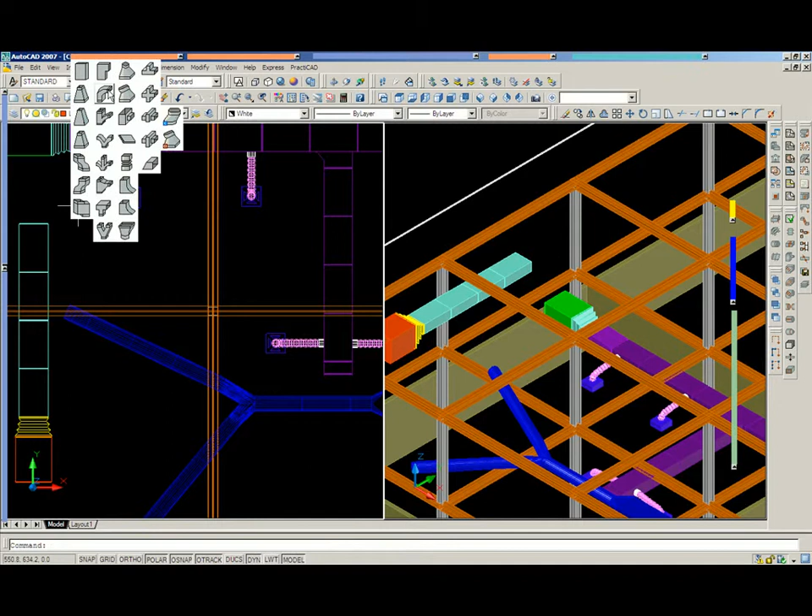PractiCAD works directly on top of Autodesk products, importing and exporting data in their native DXF DWG format. This allows drafters to create 2D shop drawings or 3D CAD drawings which can be sent to other mechanical contractors for coordination. PractiCAD allows you to take advantage of AutoCAD's ability to design in 2 or 3 dimensions simultaneously with great ease. However, with our unique PractiCAD tools at your disposal, you will be able to detail up to 70% faster than working with straight AutoCAD.

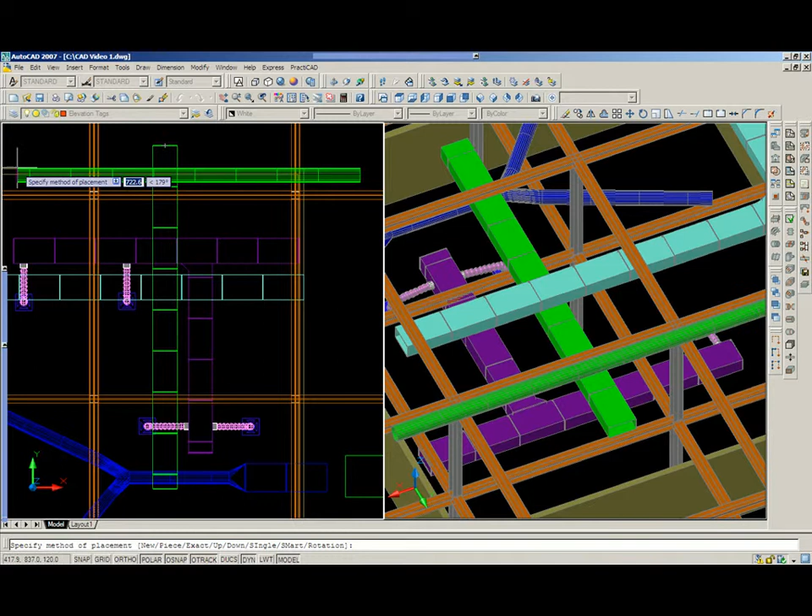There are many advantages that a detailer gets when they start to utilize PractiCAD, but 3 we will focus on here are the ease of use, speed of detail through automation, and the ability to integrate all levels of the production process.

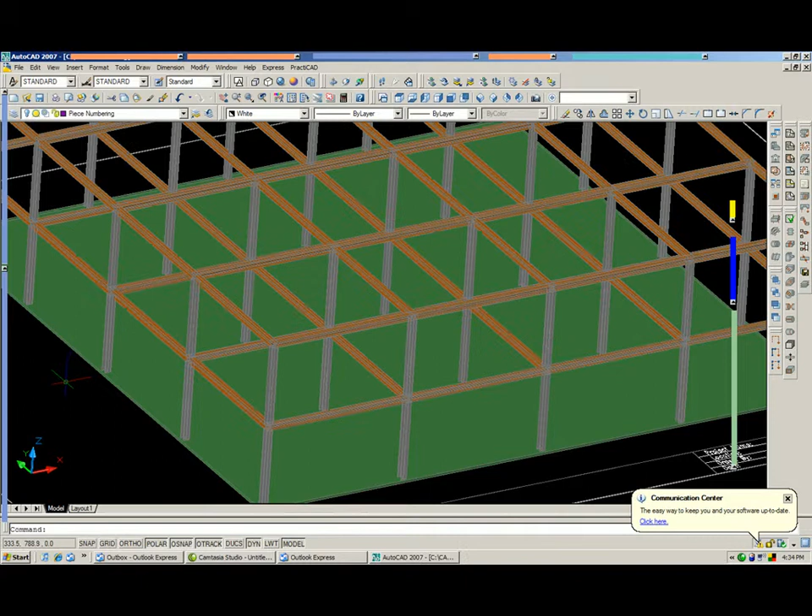Just like PractiCAM, PractiCAD comes with a completely customizable interface where we can create bins to hold all of our items such as rectangular, round, or oval duct. We also have a full set of architectural items which can be created by the user and put into catalogs for easy access later. Some of these items include concrete slabs, columns, beams, ceiling grids, diffusers, walls, duct, and flex. All items can be drawn up in 2D or 3D and exported out to other Autodesk products for coordination. All ductwork is exported out directly for instant fabrication.

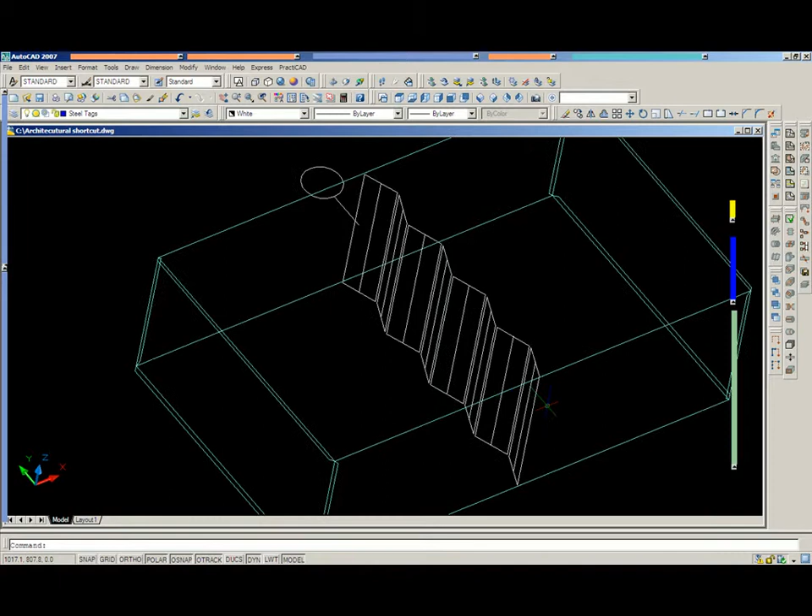On top of the items we have already mentioned, PractiCAD comes with a complete set of accessories which can be imported from PractiCAM or exported for manufacturing. Some examples are radius vanes, turning vanes, a variety of dampers such as single volume, parallel blades, opposed blades, smoke dampers, fire dampers, counterbalance, motorized, a variety of dampers for round pipe, and you can even get tie rods.

All come in a what you see is what you get format, and when exported will have all of the manufacturing done by PractiCAM, such as the mitering of splitter vanes or damper shaft inserts. This is yet another step in true automation.

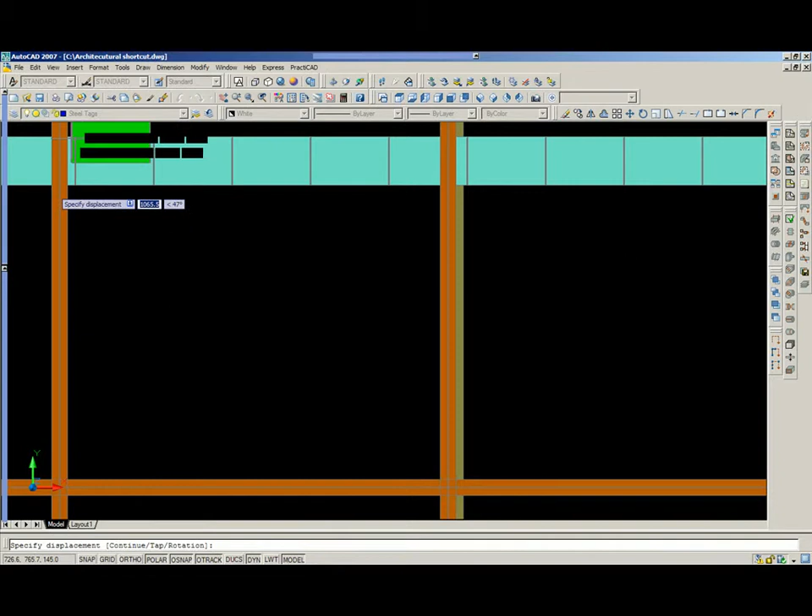First, let's start with the basics. Placing objects with PractiCAD is simple to do. All you need to do is select the object you want to place down, change the parameters, and select your elevations. PractiCAD will automatically track your elevation points and reference points as you move duct throughout the system. PractiCAD will also adjust certain things based on fabrication standards.

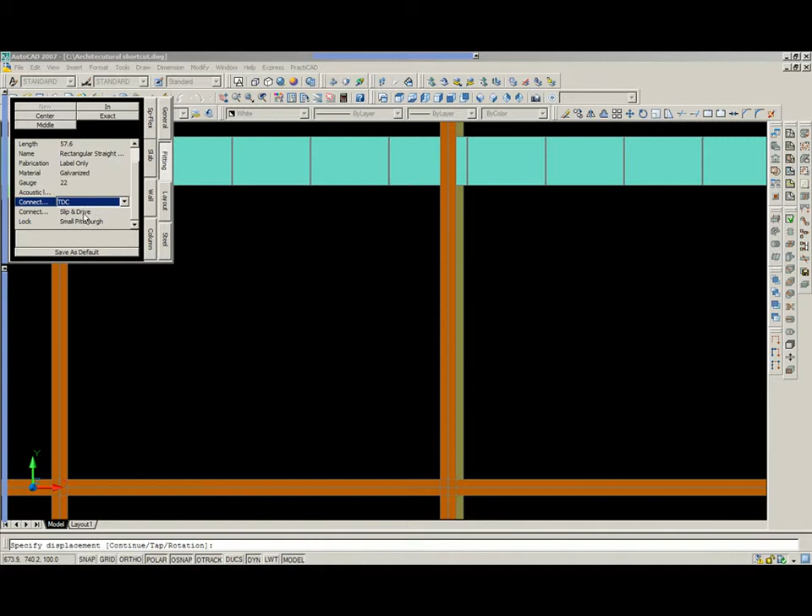For example, if we pick up a piece of rectangular duct, you will notice that slip and drive connectors yields a 59-inch length. However, if I switch the connectors to TDC, you will see PractiCAD automatically adjust the length of duct based on our own standards.

Another thing PractiCAD will do is adjust duct properties based on an unlimited number of specification tables. You will see as we pick up a specification table here that PractiCAD will ask us to do one of 3 choices. We can apply spec table to new fittings, entire drawing, or current selection. This means that at any point in time, before or after I lay down a duct system, I can change the parameters and make them adhere to a specific specification table.

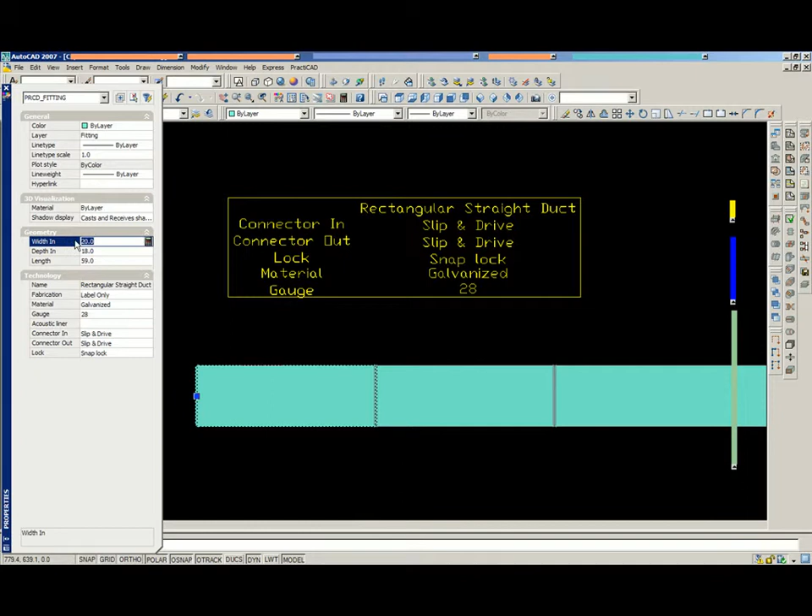Notice here as I change the width on this duct line that you will see that the locks, gauges, and materials are all adjusting automatically for us. Not only do we see the values changing, but what you see is what you get graphics will also allow us to see spec tables at work. Here as we orbit, you can see that TDC connectors have been applied to our duct system.

One of the key elements that contributes to PractiCAD's simplicity is our automatic duct line editing. We understand that plans will continue to change as you coordinate with others, making it very important to be able to adjust your drawings on the fly without having to erase and redraw. Notice how PractiCAD automatically edits things here as we adjust pieces and full duct lines up and down the system.

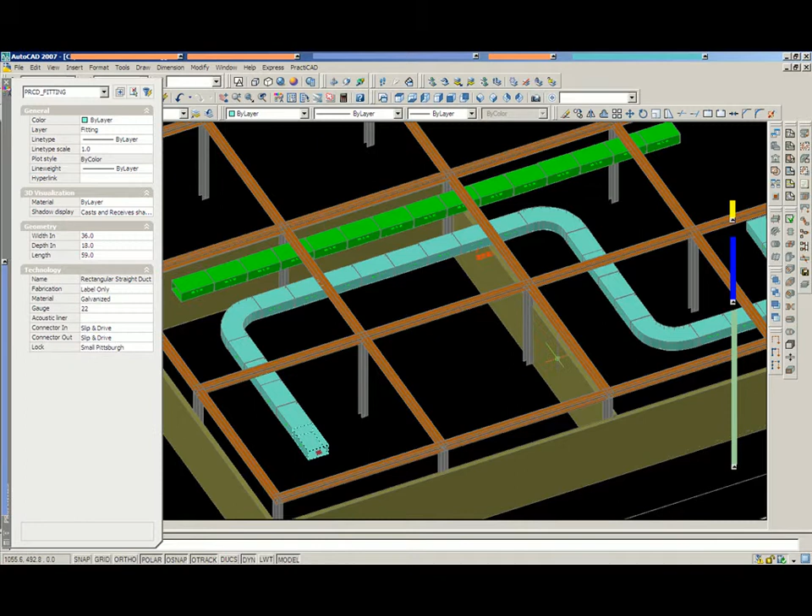To edit just one piece of duct, all we have to do is click on the duct at any time and all of the parameters will appear right over here on the left. Here we can change the size of the duct over and over, and you will notice that our duct line automatically changes for you, keeping the duct run's integrity intact. You will notice that even the tags are maintaining their current positions and elevations as we move throughout the system.

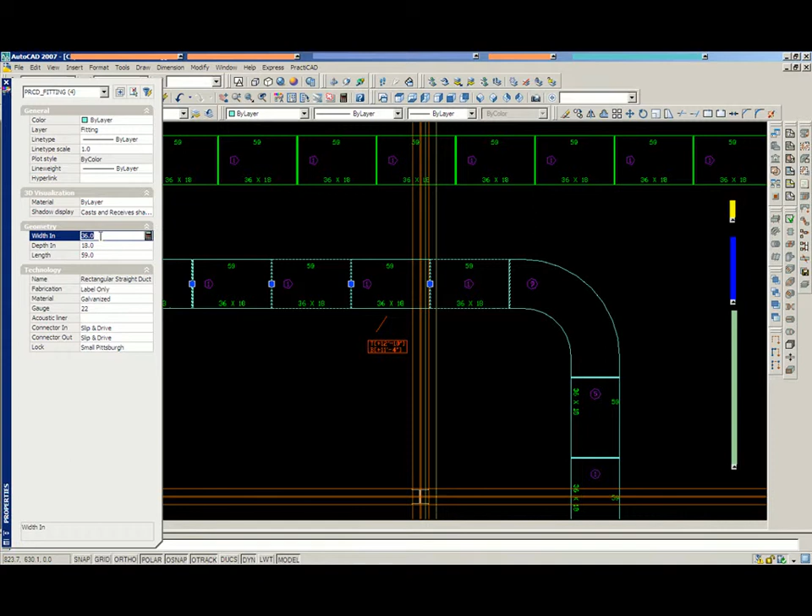We don't have to adjust just one piece of duct at a time either. Using a specialized automatic select, I will select 4 pieces of duct and simultaneously edit them all at once. Notice here as they are highlighted that I'll adjust the width and depth of only 4 pieces.

Notice the changes here. As you look closer, you'll see that not only are the 4 pieces changed, but PractiCAD has automatically added a transition before the change and turned the elbow into a drop cheek elbow to compensate for the adjustments. Even the tags have once again changed to their proper values, size tags and elevation tags.

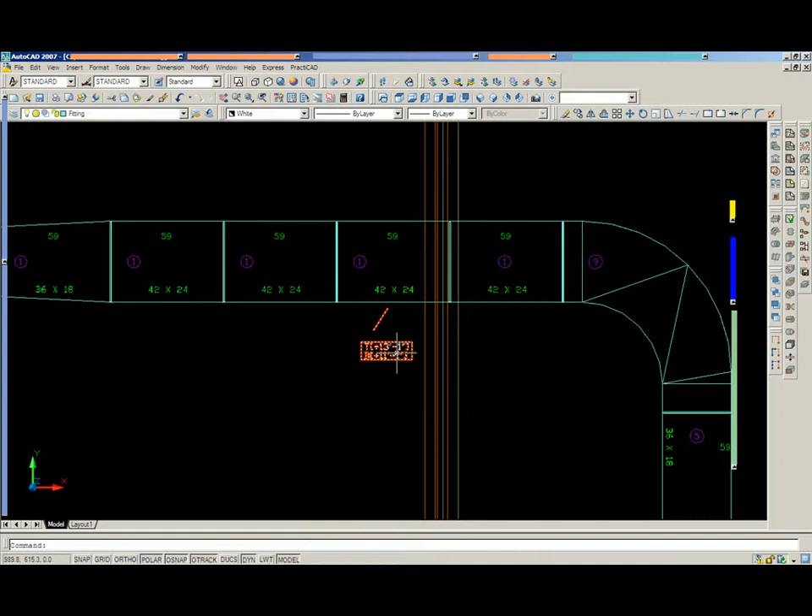These are just some of the options within the system. You can create numerous different scenarios if you like. Here's an example where we decide to add liner after we have already completed the run. Notice that PractiCAD will auto-adjust to compensate for the addition of the liner as well.

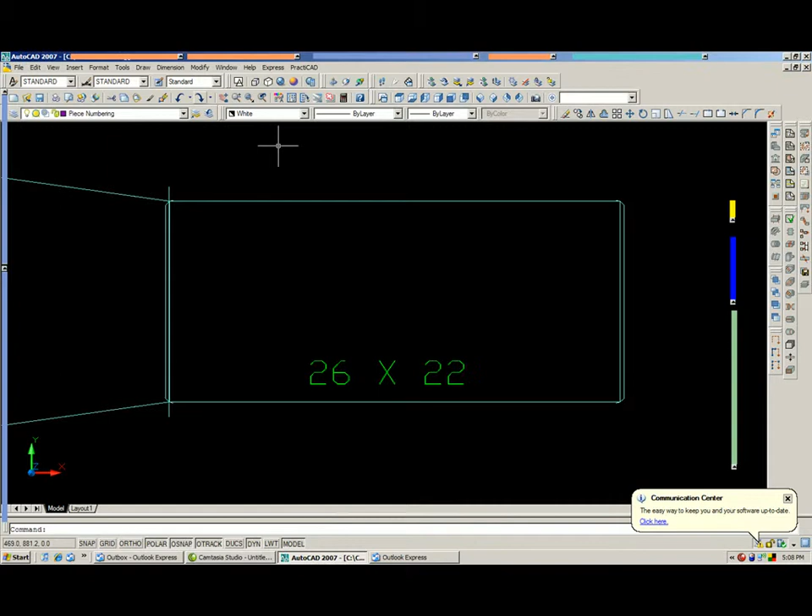As you might have guessed, PractiCAD comes with a very intelligent custom tagging mechanism. Users can design any type of custom tag they would like and drop it in their bins for easy access. Here we are laying down some of the different types of tags we offer. We can do size tags, elevation tags, general tags, property tags, or the ability to design any true custom tag we want.

For example, here we have a transition tag that knows whether the top is up or down for this transition, and it marks it accordingly.

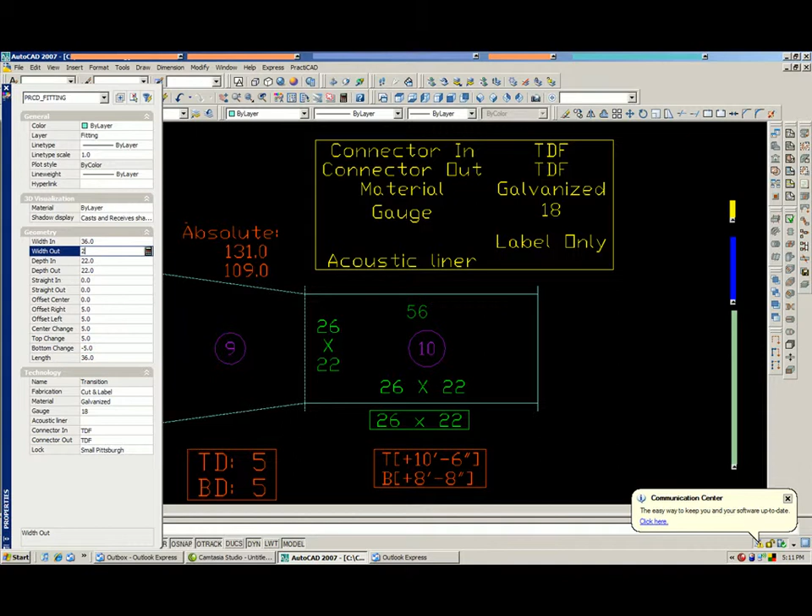The most important fact is that our smart tags know the properties to which you apply them. You'll notice here as I continue to change sizes, elevations, or properties over and over again that I do not have to retag the drawing. Everything automatically adjusts. As I change elevations here, notice the absolute elevation tag up top and the elevation tag on the right completely adapt to the new adjustment.

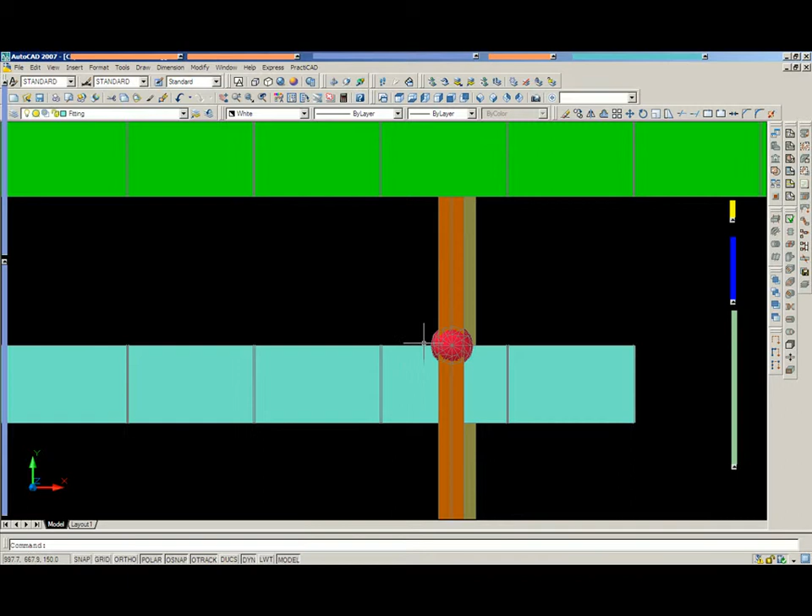PractiCAD also comes with a state-of-the-art collision checking mechanism. You'll notice as we run duct into this beam that PractiCAD automatically flags it with a collision mark. If you click on that mark, the system will tell you how far you need to move one of the two objects in order to clear.

This makes things easy for working in plan view. However, at any point in time you can highlight a specific area or select objects and click on our partial view feature. This will separate the area you are looking at and put it into an orbit view so that you can easily see everything in 3D, just as you see here.

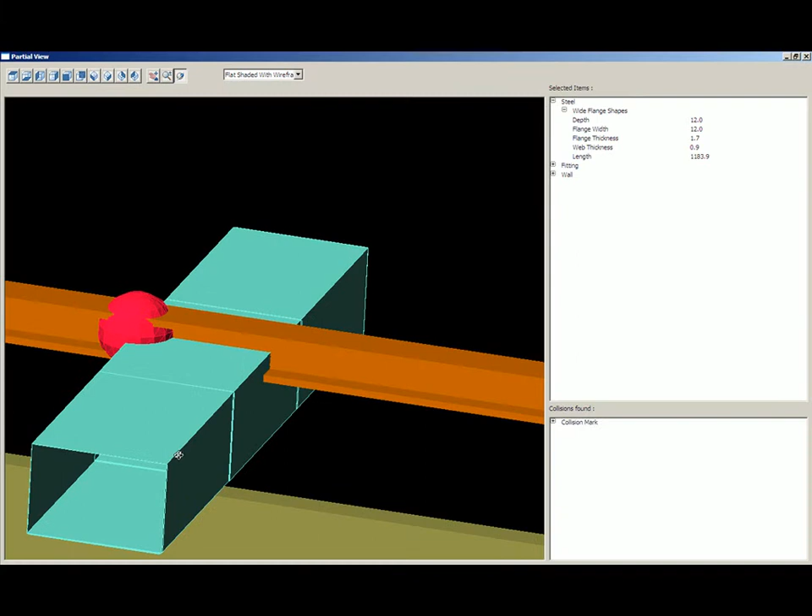You will also get a breakdown of the parameters for all the objects you highlighted. This also makes spotting collisions easy. All you have to do to avoid this trouble is move the duct line down by the amount PractiCAD has specified.

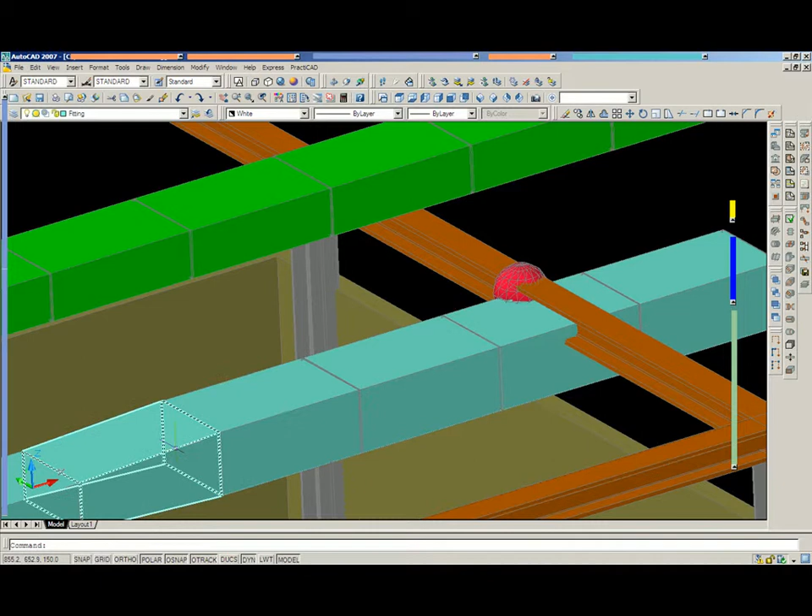Since duct line editing makes things simple, we will just adjust the transition and immediately we will see that the collision mark disappears, letting us know it is okay to go on and continue working.

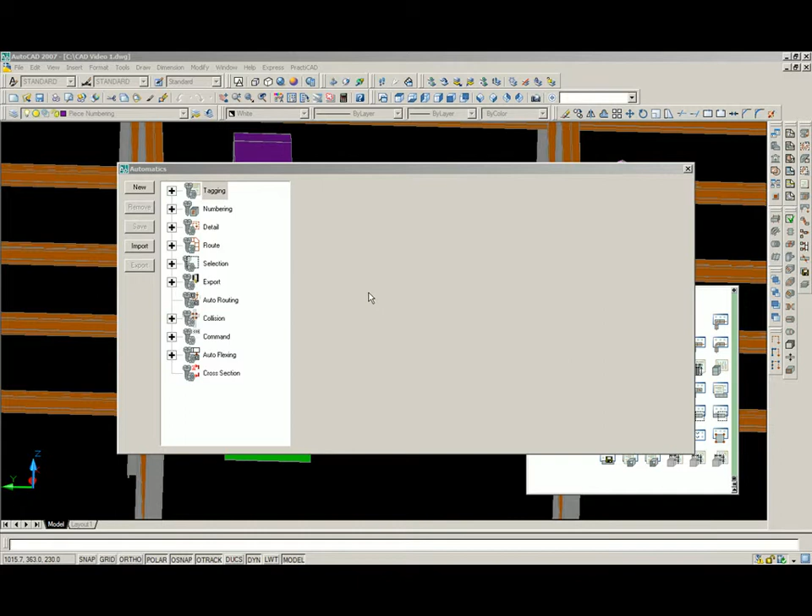Not only does smart custom tagging, geometric editing, and advanced collision checking make PractiCAD easy to use, but we have introduced a new CAD concept called automatics. An automatic is essentially a one-touch click, user-defined, that will do any number of tasks inside PractiCAD. We have them available for all of the following, including detailing, routing, numbering, tagging. The concept speeds up the drafting process by 50% or more.

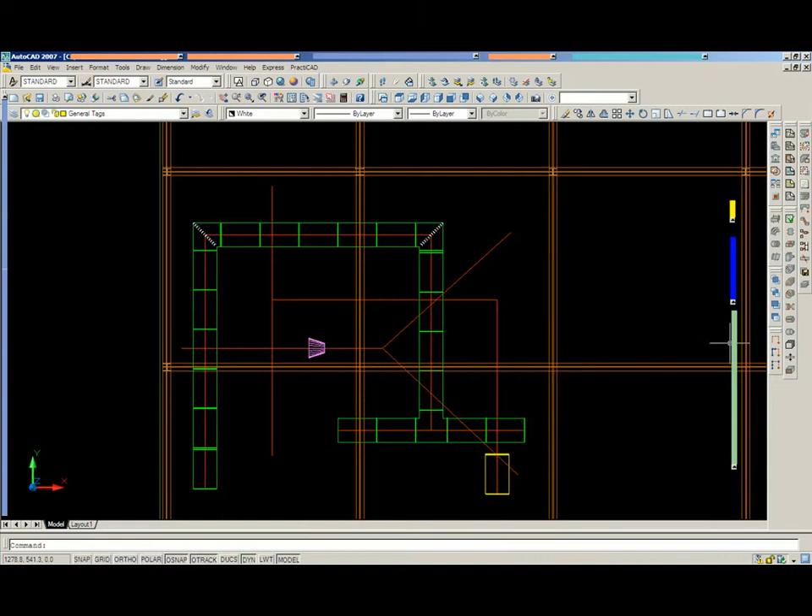Let's take a look at some examples of these automatics at work. First, we will show 3 detailing automatics. Imagine I'd like to detail a duct line on a given elevation with a given slope, with slip and drive connectors, square elbows with turning vanes on turns, finish length pieces of duct, and square elbows on tees. I can tell PractiCAD to do all of that in just one click, as you see here.

Now we will detail the second line with radius elbows, radius turns, and radius tees. Third, we will detail in finish length pieces of round pipe, a reducer, and a Y. All of this can be accomplished with one click, and as you can see here, automatics for detailing make things quick and easy.

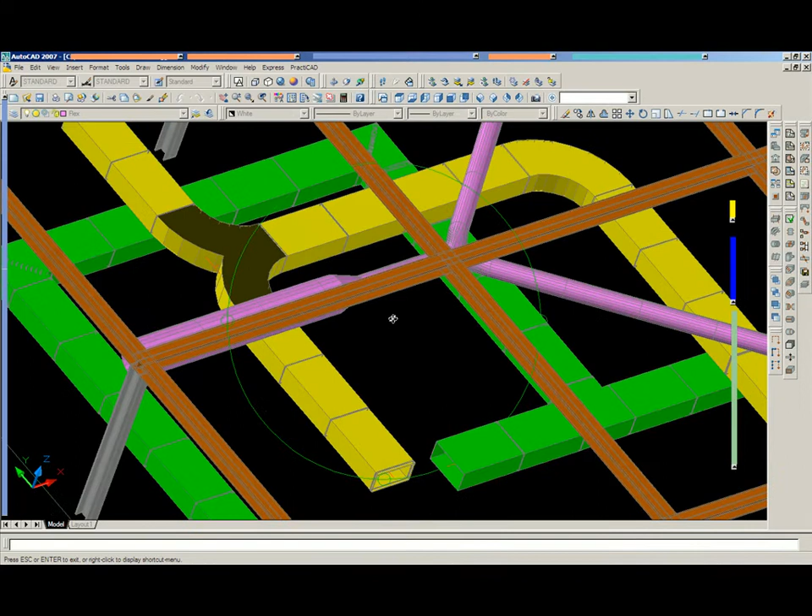Just like we do for full duct lines, we can detail or route duct in between breaks in duct lines. This makes it easy to fill duct between 2 points, even if they are on different planes. You can see here as we put our drawing on the side view, and then as we orbit it, that we have duct with different sizes that are at different heights.

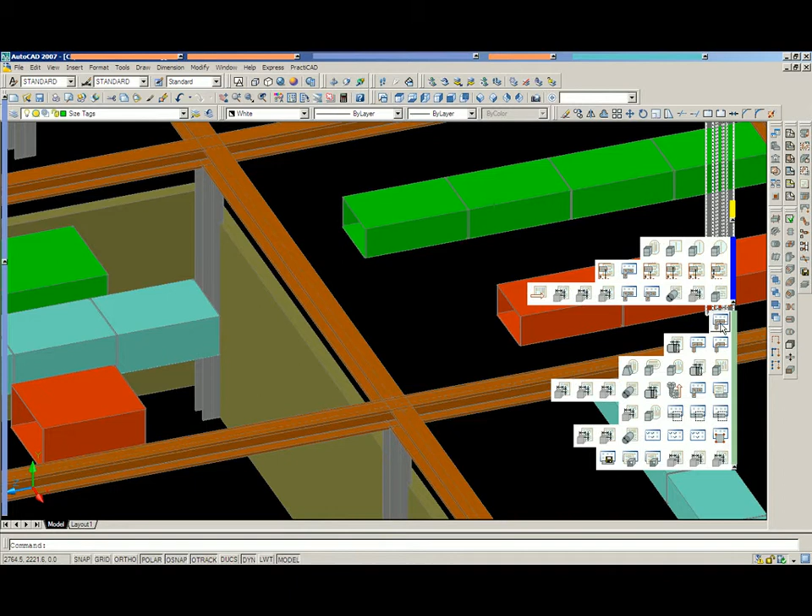Watch as we use our routing feature to route in between these 3 duct lines. The fittings that we are using are selected by the user. For example, we are going to connect this piece of duct in blue to the other duct line. You'll notice that it decides to use rectangular duct followed by a square elbow with turning vanes in it. That was user defined; he specified it during the automatic.

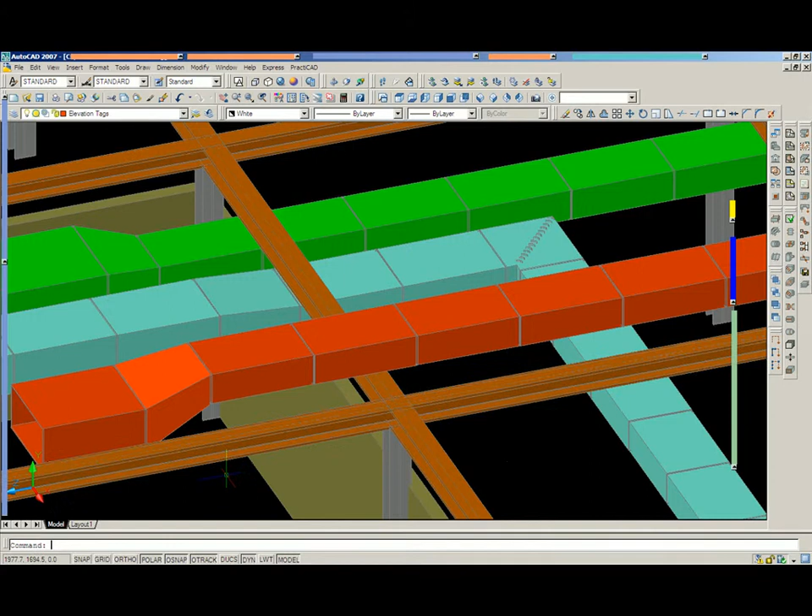As always, once a duct is routed properly, we can immediately start editing the duct line on the fly if we'd like. When you combine all of these tools, you have a very powerful detailing program that will greatly reduce the time it takes to finish the job.

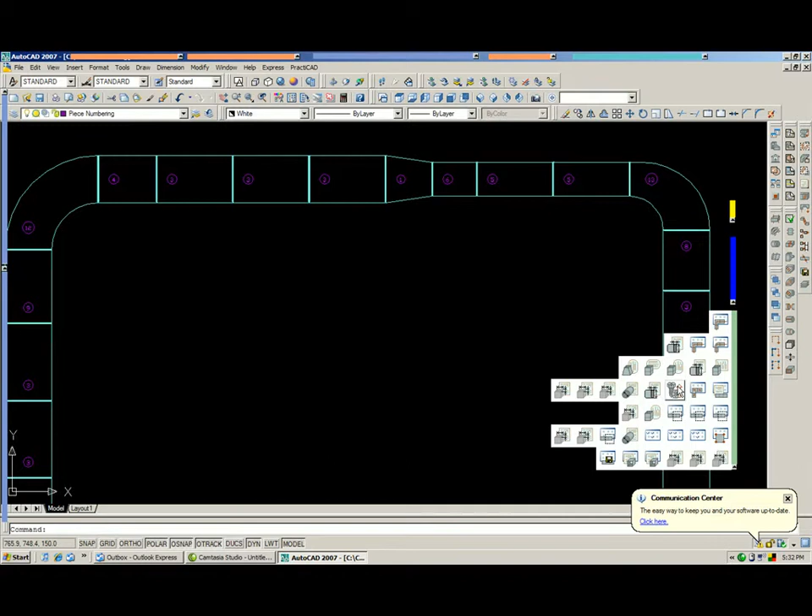Just like routing and detailing, I can also create one-touch automatics to place piece numbering or tags down. By designing custom tags and telling PractiCAD to place them at given locations, I can speed up my detailing process tremendously. I might want a width by depth tag that goes between 2 points, or one that goes on straight duct but skips elbows, maybe piece numbering in the top left corner of each duct, custom transition tags, custom elevation tags before and after changes in elevation, or size tags before and after a change in direction.

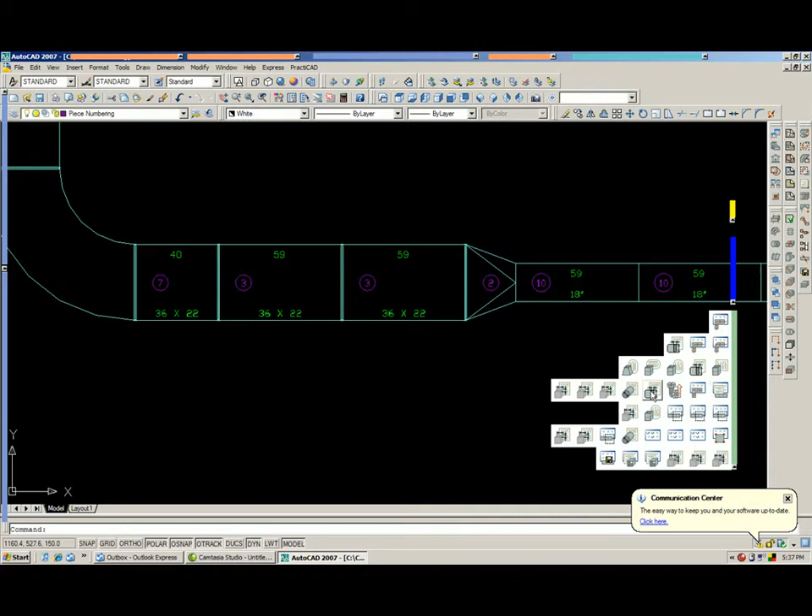The possibilities are limitless. The bottom line is that detailers have styles they use over and over again. PractiCAD allows the user to design one-touch clicks that lay out these styles for them. This keeps the drafters fast, but also allows them to detail with the same styles across the board, making them consistent from drawing to drawing.

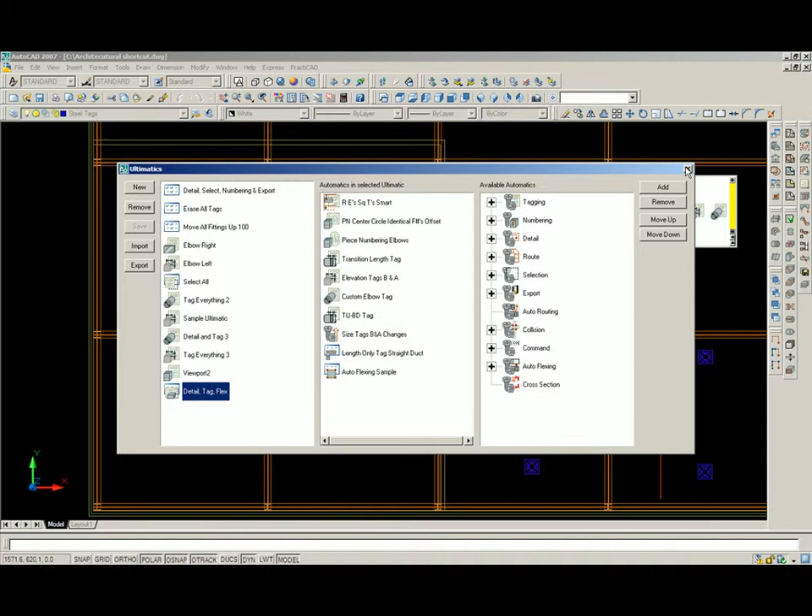Ultimatics. An ultimatic is a one-touch click that combines any number of automatics. Here you can see as I create an ultimatic by listing the automatics I want to use simultaneously with one button. With this feature, I can detail, piece number, tag, attach flex, or anything else, and do it all with the touch of just one button.

Watch here what happens on just one click. I will zoom in and go about the duct. You can see that all of our tags have been placed down simultaneously, exactly where we want, all with the touch of just one button.

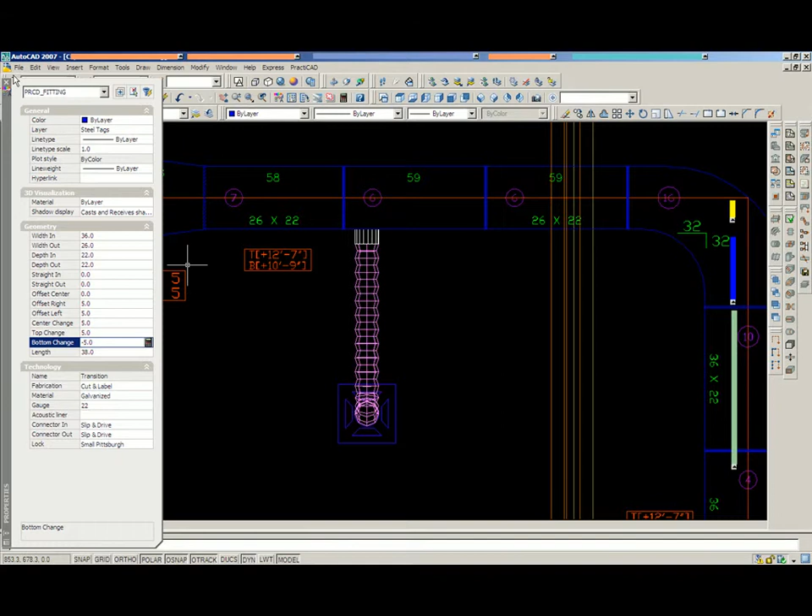The best part is, as always, you can continue to adjust everything on the fly. You never have to worry about redrawing anything. Just click on what you want to adjust and PractiCAD will adjust it automatically for you. Here we will run another Ultimatic. Just imagine the speed of detailing when you can do so much with just one click.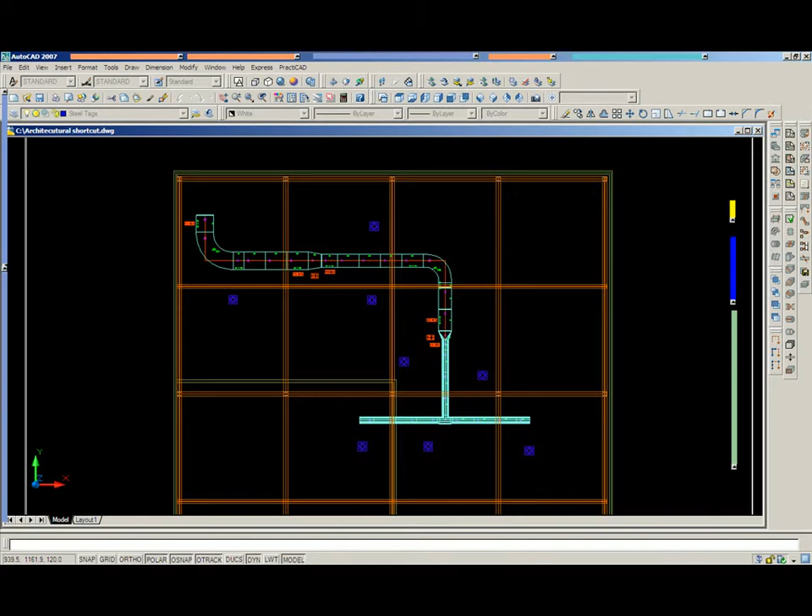Automatics and Ultimatics are currently concepts and designs that are exclusive to MetaLab. No other systems on the market can detail or tag a drawing more effectively or efficiently.

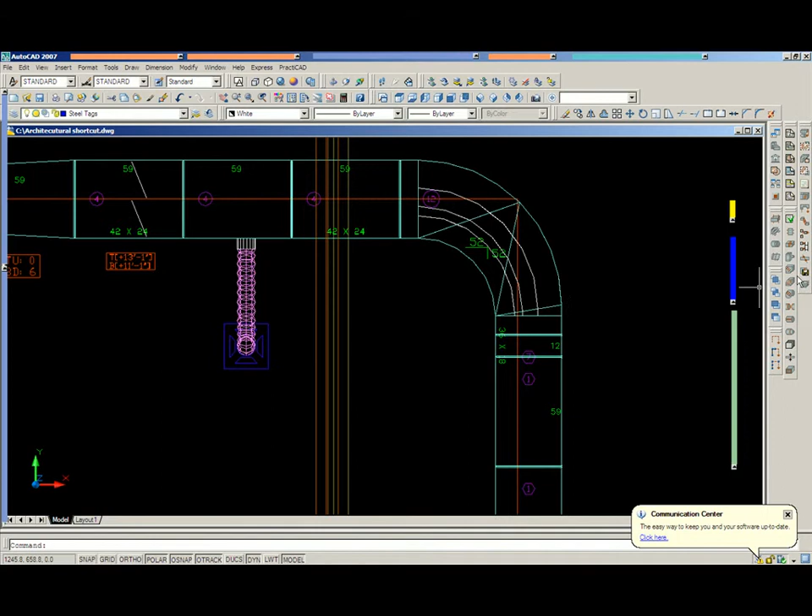Exporting the duct line is one of the most important parts of integration. Instead of having to input each and every fitting into your Plasma software, just download everything directly to PractiCAM. PractiCAM is the most advanced manufacturing system on the market today, and everything downloads directly from PractiCAD to PractiCAM and vice versa. Once we have completed our line, we simply press the export button labeled Takeoff, and everything will be sent directly to PractiCAM.

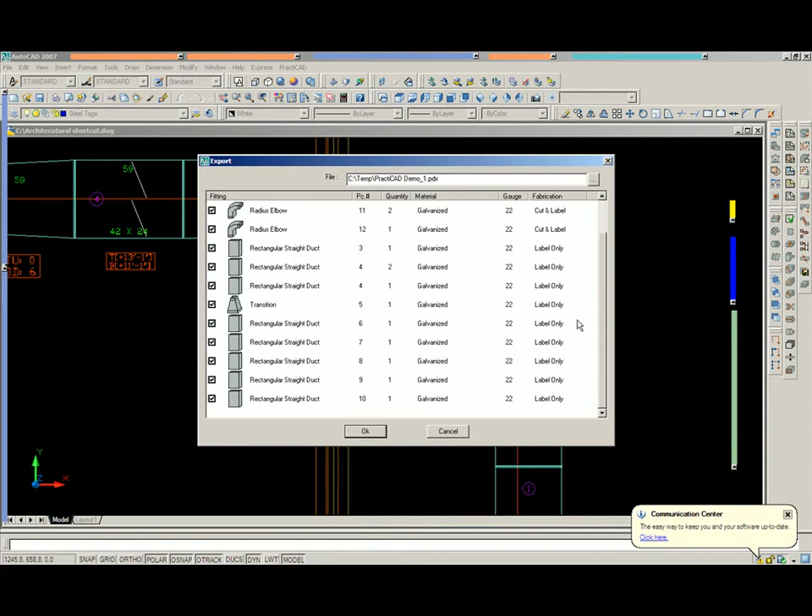You will get a list of all of the fittings that are being sent over, and when you go to PractiCAM, you will see them under the file you just saved them in. Here is a list of all of our fittings. Now all you need to do is highlight all the fittings you'd like to put into a takeoff, copy them, and paste them directly inside.

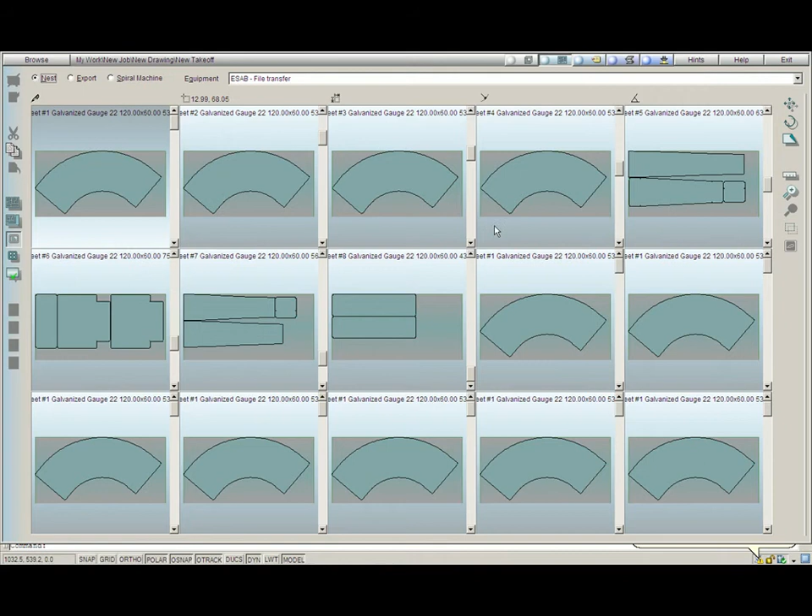At this point, PractiCAM will do all the rest of the work. It will do all of your design, it will do all of your nesting, it will do all of your labeling as you see here, and it can also print out any type of custom report that you would like. Last but not least, it will do all the fabricating for you.

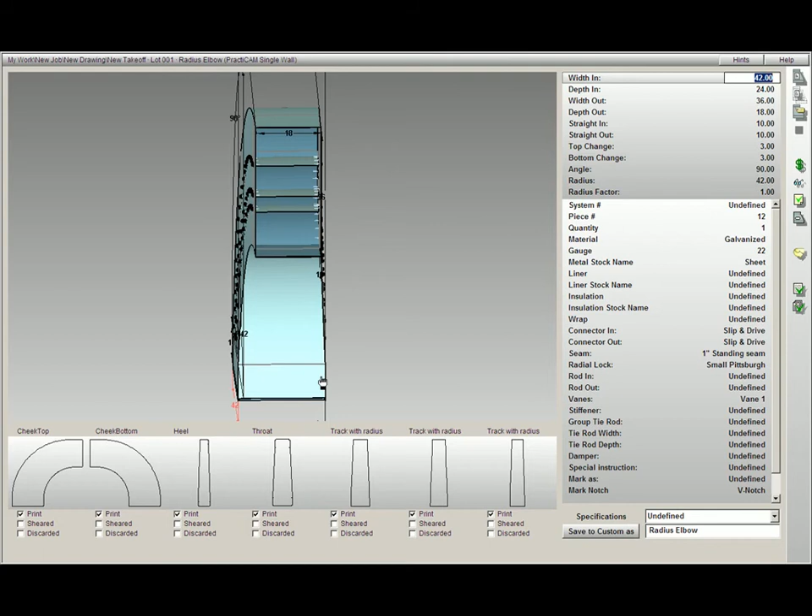And fittings can be exported to a coil line as well. You will see that you can also modify the fittings right here if you'd like. Take notice that the drop cheek radius elbow with splitter vanes in it has all the manufacturing done for you. The vanes are mitered, the holes are burned for tack welding, and here we're going to put in a custom modification.

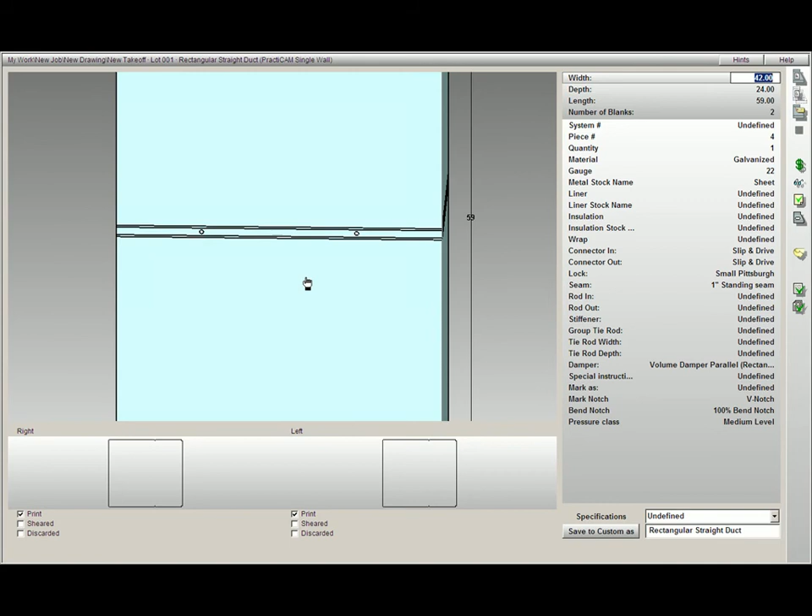The same goes for the dampers in the rectangular duct. You'll notice that the dampers have been downloaded, and the damper shaft inserts have been burned out for fabrication. This goes for all accessories that you download from PractiCAD to PractiCAM.

Once things have been downloaded, last but not least, you can get a complete cost estimate on each individual piece of duct, or you can get it on the entire job. This way you can see how close your bid was to the actual job.

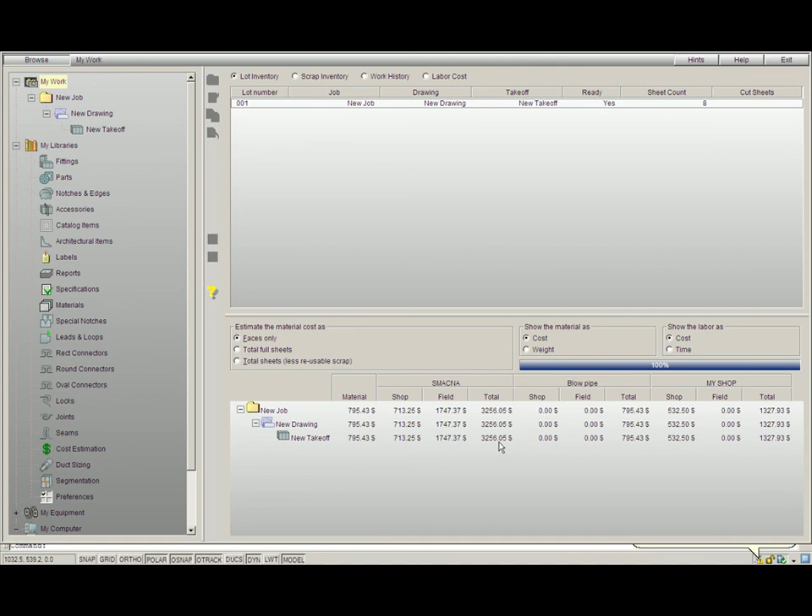As you can see, PractiCAD and PractiCAM are fully automated, fully integrated manufacturing programs. The difference they will make in your production process will be substantial.